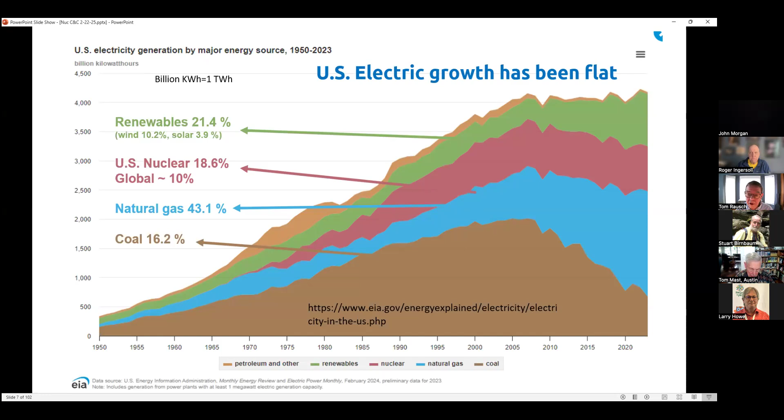I've got four major reasons why nuclear is such a big deal now. They really emphasize the things I see a lot of non-governmental organizations getting wrong, and I hate to say it, but that's really been one of the big reasons holding nuclear back.

So I'll start with: we need more power, we need more reliable power. This goes back a year, and I'm doing that on purpose. Just a little over a year ago, all of a sudden electricity demand is spiking. I think most of you probably know why - the data centers and artificial intelligence seem to cause a big change in everybody's forecast.

Go back again a year ago, and the forecast for 2028 was 38 gigawatts of growth in demand. That is massive, I'll give you perspective on that in a second. Then all of a sudden, December, just a month and a half ago, the forecast was double or triple that. It's crazy.

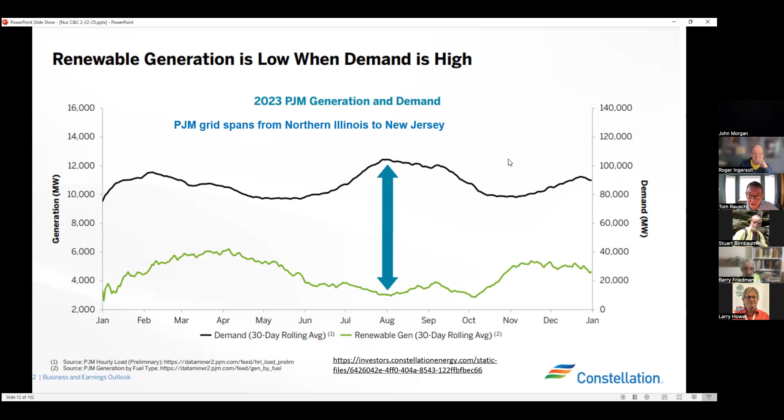Some of the times when demand is the highest here, if you can see my cursor, the renewable output is the lowest, and that's awful. Of course we don't have the solar generation up north like you do down in Texas, but you go through the same type of things on cloudy days and cold days.

A lot of well-intentioned green groups just ignore this concept and think, well, we can store the excess. You'll see in a little bit how hard that is to do.

I like this one. This is what the nuclear industry likes to tout: the capacity factor, or what percentage of the time you're getting your full power. Some of that's not fair because nuclear plants are intentionally run at almost full power for economic reasons, but to compare it to wind, that's a really good number.

That means a third of the time you're getting your wind output, and in solar nationwide it's roughly a quarter of the time. But that's because the major grid-scale solar installations are in the south and west. In Northern Illinois, if we tried to do it on solar, we're talking 10 to 15% capacity factor. Houston, a lot of you from down there, 17%.

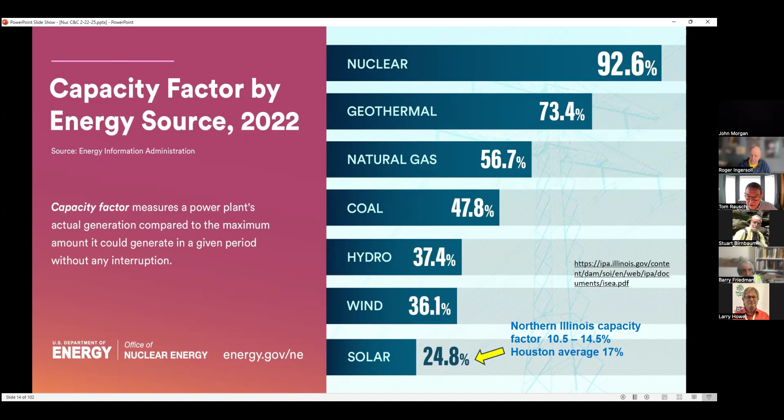I think a lot of people don't realize that to equal full power capability, you need, just to start, 4 times as much solar in a good part of the country and 3 times as much wind on average. Then you need somehow to connect it and have it sitting there and available as stored energy.

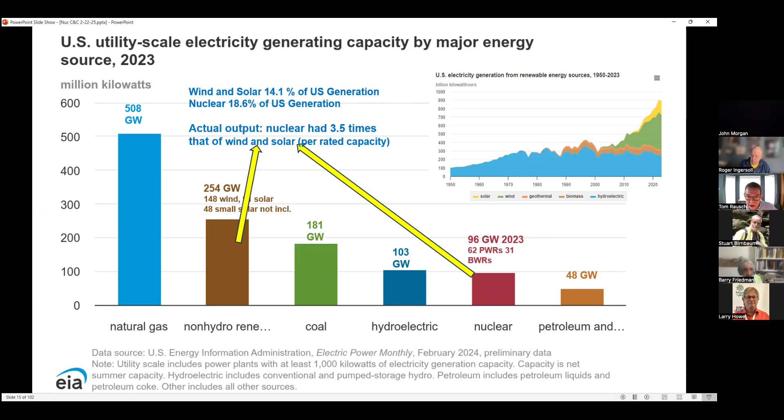When you look at the actual output of all the wind and solar in the country from 2020 to end of 2023 and compare it to nuclear, it was 3.5x. So in terms of per rated capacity, nuclear was 3.5 times more. That's just a reflection of the previous slide.

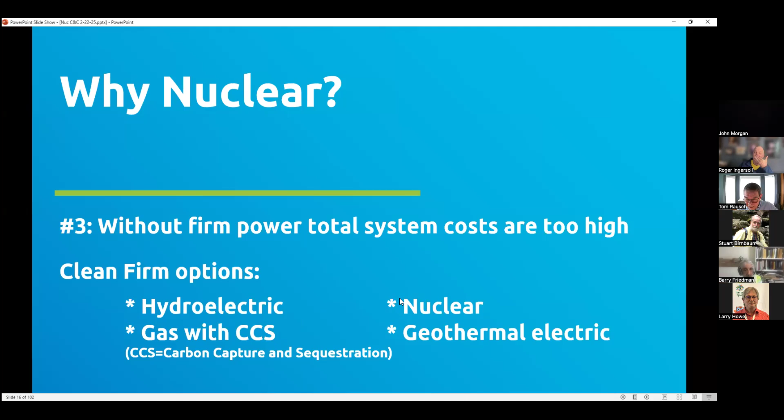Let's get into more specifics on what happens if you try to run a grid without something like nuclear. Without firm power, as defined below, it's just too expensive. Nobody's done it other than in really unusual grids with a lot of hydropower, like in South America. By clean firm power, I mean hydroelectric, nuclear, gas with carbon capture and sequestration, or geothermal electric, not geothermal heating and air conditioning.

This is my favorite resource. CCLers are going to recognize this name, Jesse Jenkins, the Princeton author of the grid study that we've referenced heavily in our lobbying, showing we've got to get transmission going or we're not going to get anywhere. He made a report on the state of California a couple of years ago, and there were 3 big-time...

What's the right word for it—think tanks that got involved in this. I think the other ones were the Clean Air Task Force and Stanford University. It was funded by the Environmental Defense Fund. Their conclusion was: without clean, firm power, if you try to do it with solar and wind, forget about it.

These wholesale prices range from around 9 cents a kilowatt hour to 15 cents a kilowatt hour if you try to go the other route. And somehow you have to build it—that's the problem. You'd have to add 25 to 40 gigawatts of clean firm power, and the prohibitive cost—even though it's only maybe 50 to 60% more expensive—you just can't do it.

You need a massive amount of land use, a massive amount of storage, a massive amount of transmission hookups without more nuclear, geothermal, or gas with sequestration. So this is a great study.

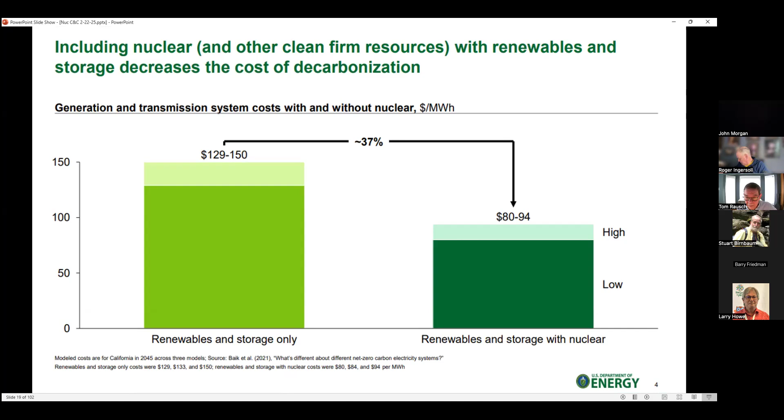And much to my surprise and delight, the state of New York just did a study, released last month, a few weeks ago. Their conclusion for the state of New York was identical to the California conclusion. Unbelievable. They identified a critical need to go to zero emissions in New York, and both New York and California are quite serious about going clean.

You need clean electricity technology that's reliable and meets the demand for power when wind and solar are less available. They call them dispatchable emission-free resources, and they say you need 20 to 40 gigawatts. That's 15 to 35 full-size nuclear units, or more decarbonized firm resources by 2050.

New York has a history of shutting down nuclear plants, just like California did, and they've been successful at it, just like California was. But they still have 4 units left, providing about 20% of the state's generation, whereas California only has 2 left, providing about 10%. So even 2 units, as big as California is, is still providing a huge chunk of California's grid.

All right, well, my last big reason why we need nuclear now: seasonal storage. Everybody thinks we've got batteries that are getting cheaper by the day. We're all set, all we got to do is take excess wind and solar, put it in a battery, and we're good to go. Batteries too expensive? All right, put it in something else, and they're cheap and easy, right? Wrong. They're not cheap, they're not easy.

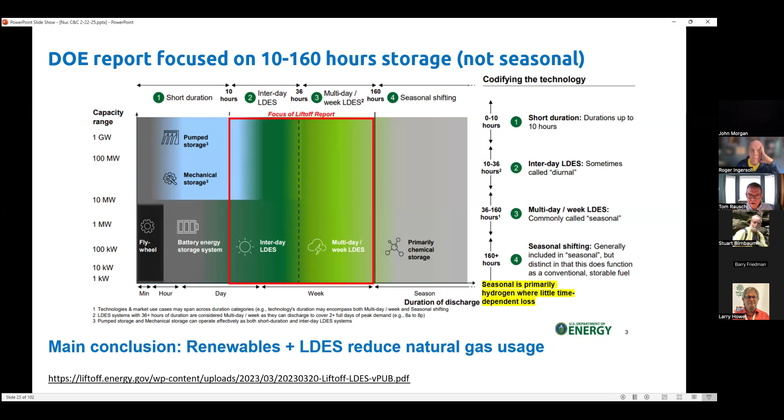So let's get back to nuclear - I'm just repeating the first point. You have to remember that having enough wind and solar to meet demand, you need to be able to last days, sometimes weeks, and maybe even months. So if you want a full clean grid, you need reliable, firm generation of something, and nuclear fits the bill. Now let's get into more fun stuff.

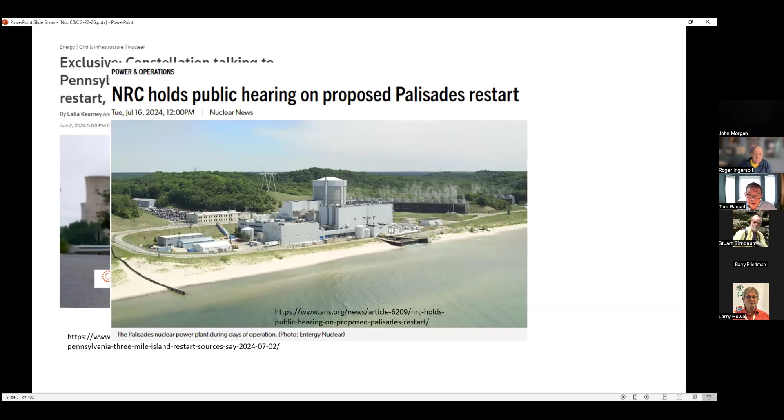Palisades nuclear plant on the shores of Lake Michigan in Michigan - we're going to do the same thing. Duane Arnold in the state of Iowa, the only nuclear reactor in the state of Iowa, a half power size one - we want to do it too.

And Microsoft signs a power purchase agreement with Constellation Energy for the Three Mile Island restart, and they're going to do it. This one I really like because they can do it without any loan guarantees, which are up in the air right now with the new Trump administration. All funding is kind of up in the air - hopefully that'll clear soon. They have a 20-year power purchase agreement.

It's 835 megawatts, almost a gigawatt. They intend to do it by 2028. I met on Zoom in a small meeting - I got to meet the plant manager and the licensing engineer as a member of American Nuclear Society. This was only a month ago, and the word I just got is they're ahead of schedule. They expect to create 3,400 direct and indirect jobs and add about 16 billion to Pennsylvania's GDP.

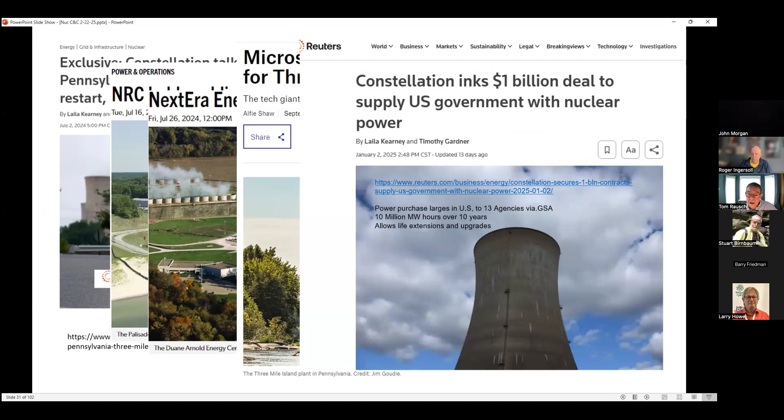And they also signed a deal with the U.S. government back in January, and I think this one is still solid, to supply U.S. government buildings with nuclear power. This is again a power purchase agreement.

And Texas, one of my favorite states, because they can make things happen. They had a blue ribbon committee create a report over a couple of years, and the conclusion of the report was basically that nuclear makes a lot of sense in Texas. This just came out in November.

And again, back to Tennessee Valley Authority - they're actually working with General Electric Hitachi to do small modular reactors in Tennessee. I noted this because this was just this year. And another one, New York, is getting more serious. And who else have we got? And a floating nuclear power plant.

So here we are, I'm up to date, only off by a couple of weeks. I could make more of these. I went 20 years and I couldn't have shown you anything like this.

So that's how much has just changed inside a year. Floating nuclear power plants, you bring them on barges. The shipping, the manufacturing can be done in shipyard scale facilities. Makes a lot of sense. And they're serious. Once you start talking factories, you can build quickly.

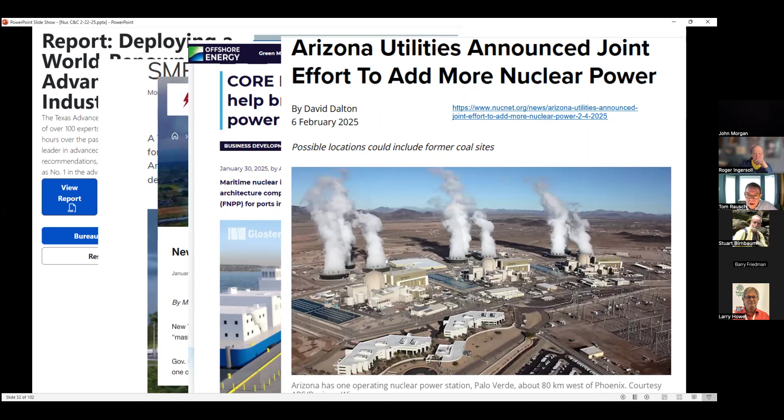Oh, another one, Arizona is looking at a joint effort. And the number of states that are doing something, at least something, it's up around one or two dozen, including Kentucky, Ohio, Utah, Wyoming. It's hard to keep track of them all.

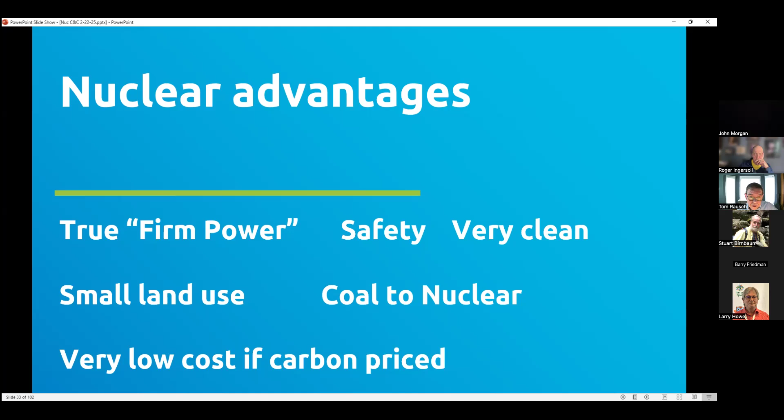So let's go back to a little more direct nuclear things. In about five minutes, we can start letting you see what areas you're interested in, because I've got a lot of slides covering just about everything. I'll hit these one at a time.

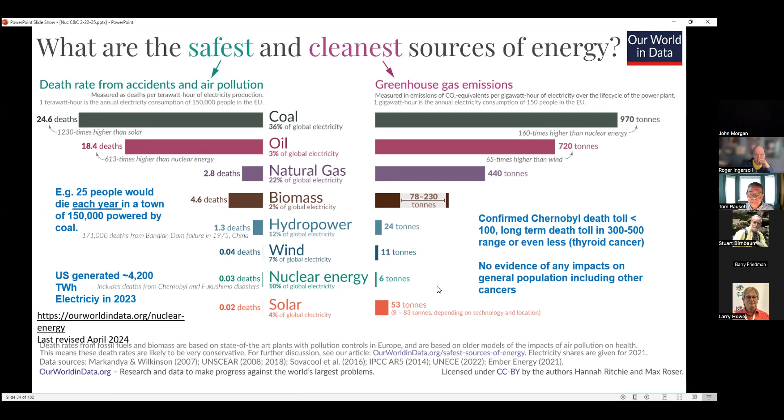My favorite one there -- I don't even know if this slide shows it, I stole it from DOE -- is the grid. You don't need to change it, you don't need to hook it up. The hookup's there, and so is the cooling water.

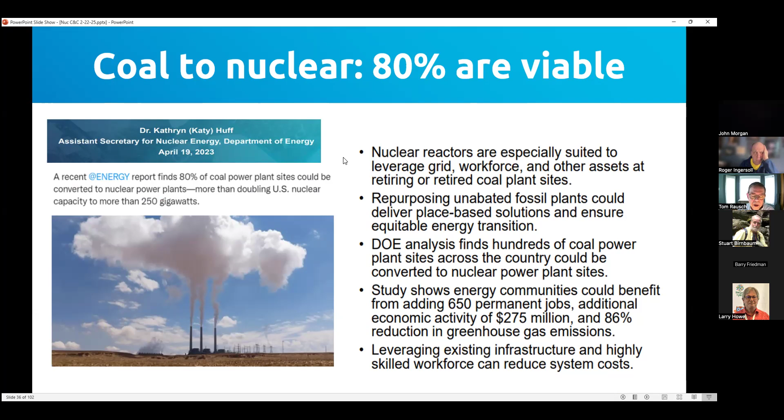You also could do it at existing nuclear plants. You could almost do the whole shot of Biden's goal, which was to double the existing amount -- actually triple the amount we've got now by 2050. You could do it at existing sites, many of which were sized for multiple reactors that never got built.

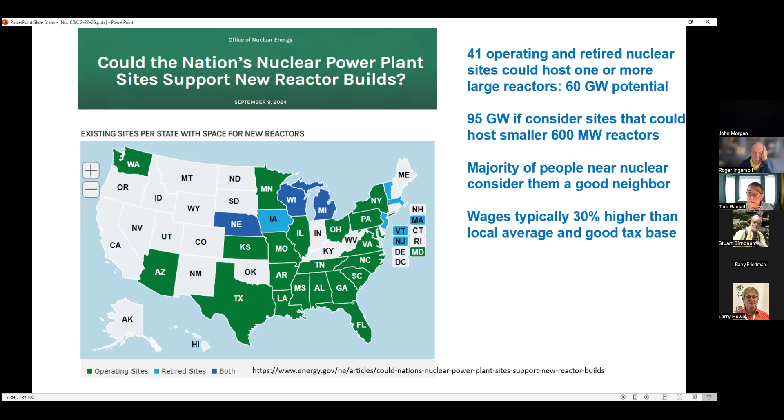A couple more slides, and then I'll open up to questions. Right now, you'll hear about generations of nuclear reactors. Pretty much the whole country is built around generation 2 and generation 3 -- those were reactors designed in the late 60s and 70s. The generation 3 and 3-plus, I would say the new units in Georgia, called Vogtle, units 3 and 4, are considered 3-plus. What's the big difference with the advanced ones? It's generation 3 and 3-plus -- and really, we pretty much have no generation 4s.

Other countries use passive safety, with almost no operator reaction needed and little or no reliance on external power and cooling. Whereas the vast majority of existing reactors require numbers of trains of power sources. I'm calling them trains because they are trains. One train might be 3 sets of pumps, any one of which could work. Another train would be 3 sets of backup pumps using a different method, maybe spraying instead of pumping. And another train doing something else.

So there's a lot of defense in depth in the old reactors, and the newest designs are passive. They use gravity and natural circulation, like a big tank for emergency coolant stored above the reactor, where you just let it drain as needed. What happened in Japan was really a loss of offsite power, a loss of ability to run these cooling pumps, that caused the meltdowns that did happen.

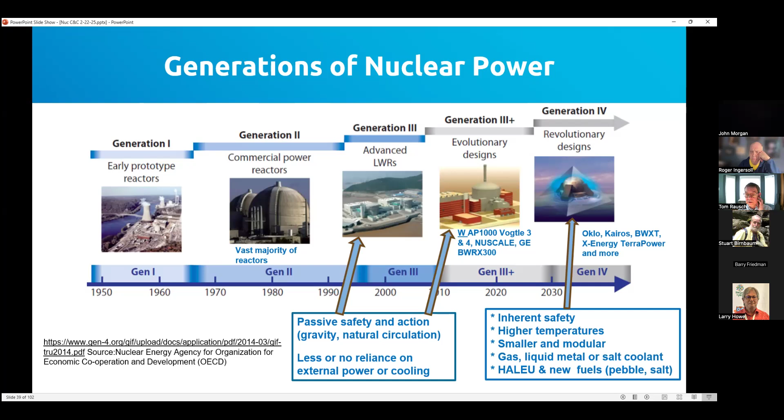My favorite part of this slide is to the right, generation 4 reactors. These are what you hear as small modular reactors. They're inherently safe. They run much higher temperatures, but very low pressures, so you don't have a pipe with a lot of force on it that could possibly break or rupture. They can be built smaller and modular, and they use all kinds of tricky stuff. They run all different sizes, small, medium, and large.

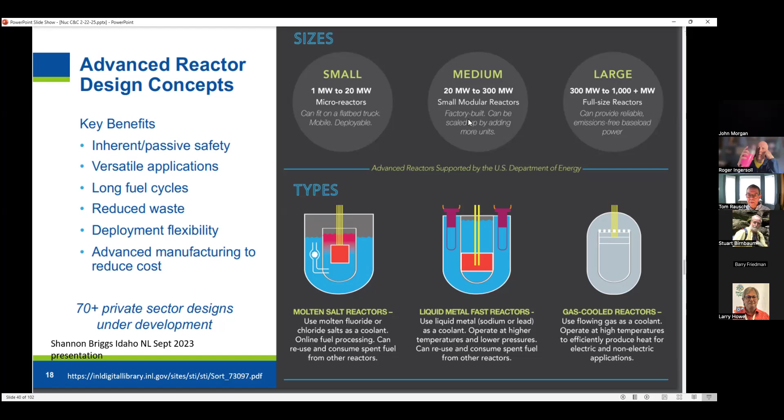Medium is really for small modular reactors. I think we're talking about micro up to about 300 megawatts, so about a quarter of the size of a full power reactor. There's a lot of projects underway, and I want to open up for questions. I'm not going to talk about all these, but all these in red have some sort of funding, and most of that money's out the door.

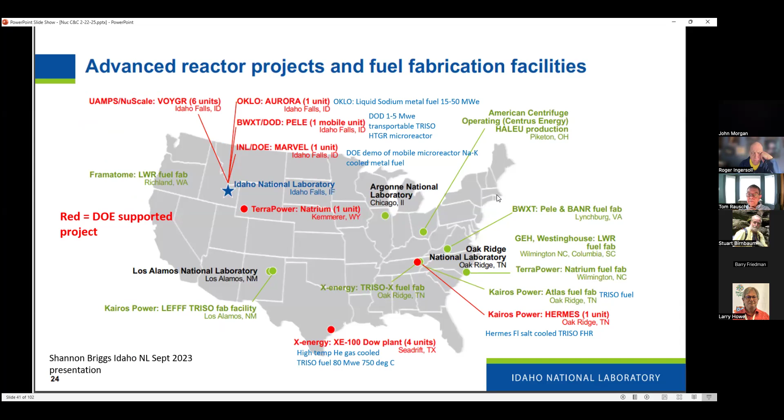And in green are more private ones going on, and around the world there's a lot. TerraPower in Wyoming, you probably heard about this one—this is one that Bill Gates is involved in. They're using liquid sodium as a coolant and really cool salt tanks to store about a third of that power and have it available during the day. So instead of being 350 megawatts, they could be 500 megawatts for part of the day.

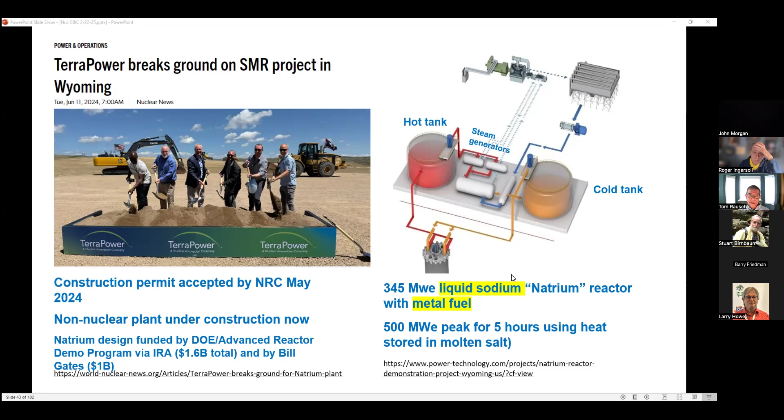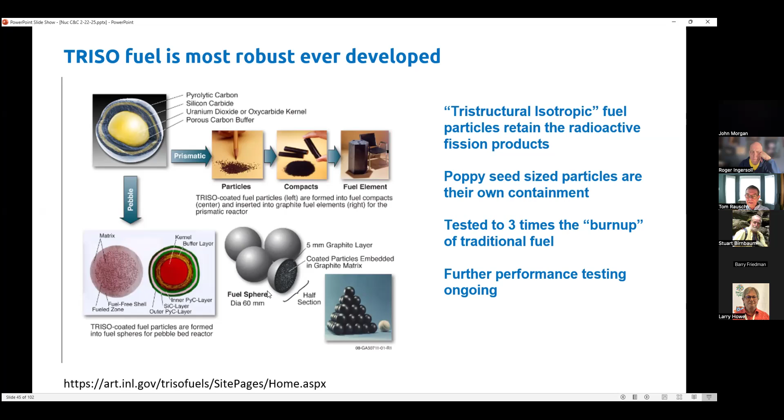Triple layers—if you look on the left of the slide, that's blowing one of these little things up. All the fission products stay inside there, and the various layers are a combination of porous and firm material that allows swelling, fission product gases to be absorbed and not penetrate. Even cooler yet, they put all these inside a ball about the size of a cue ball or tennis ball, or a little smaller. That's the next containment level. And then you run these through the reactor. It's awesome. It's called TRISO fuel.

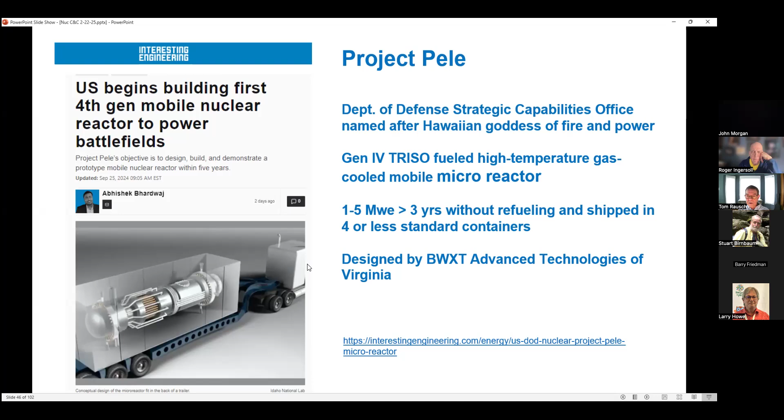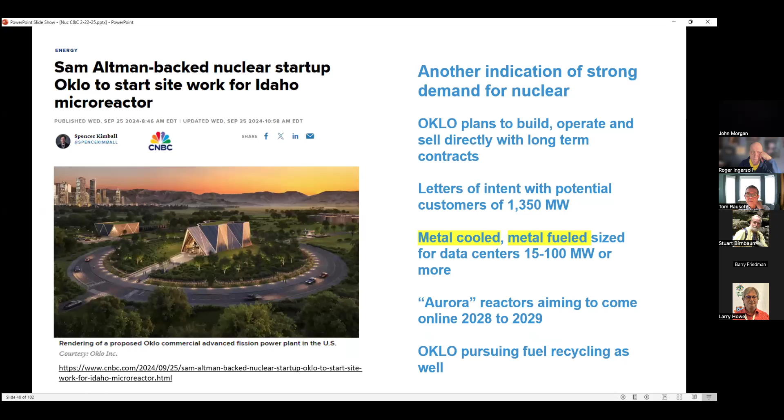I want to open up to questions. The carbon fuel dividend would have made nuclear cheaper than natural gas a long time ago.

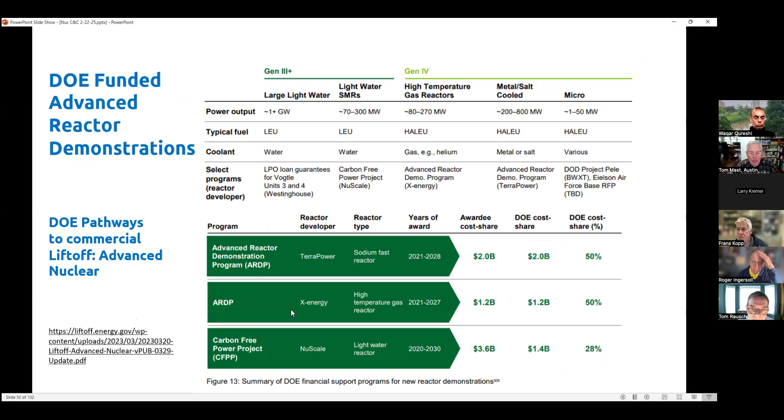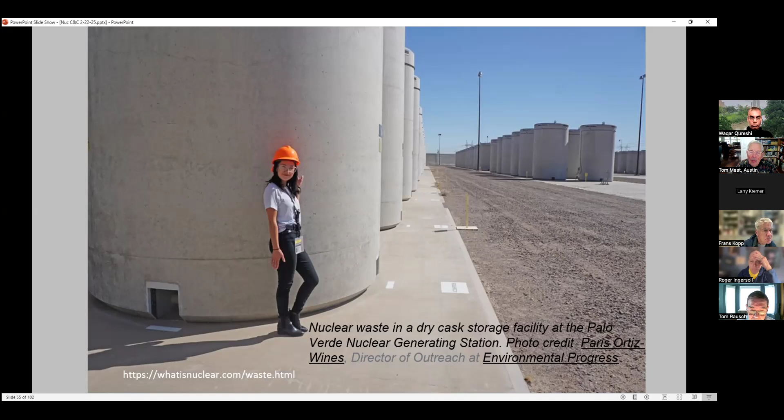This is what it looks like - dry cask storage. You can hug it, you can kiss it. You can hit it with a missile, you can hit it with a truck, and nothing's going to happen. I could show you a great movie of that - they literally took one of these things and hit it with a missile, and the missile destroys parts of the concrete, but the dry cask underneath it, the steel portion, survives.

All the waste would fit on a football field. What's the actual number I had here? What is it - 24 feet tall. And 32 times more waste per day from a coal plant - hazardous slurry - than we did in 45 years of nuclear waste. And it's all paid for: $0.001 per kilowatt hour, 0.1 cents, up to 2013. That's 48 billion, and it's worth a lot more now because of the interest paid on it.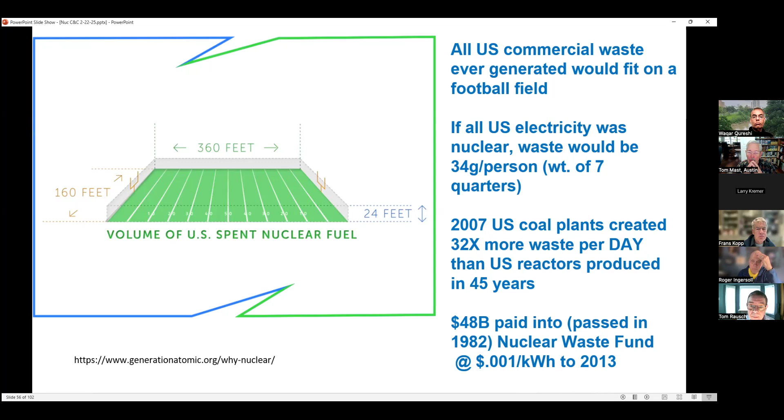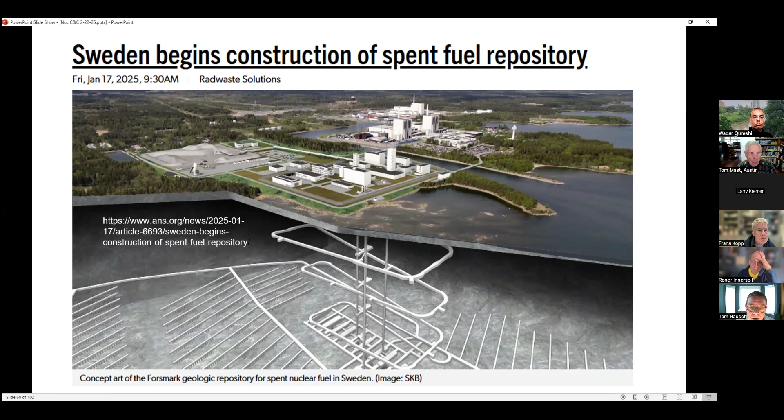So, sorry, let me try to unshare again. Sorry for my digression there. But let's go to the next question.

Tom, thank you very much for a great talk and excellent slides.

I was wondering if you could talk a little more about how nuclear power generation can be integrated with wind and solar - is it actually a good match? Oh yeah, it is right now. So my basic conundrum, as a layperson, is that my understanding of nuclear is high capital costs, so you want to run the plants pretty much full. But wind and solar are variable. If you think about matching with gas on an economic basis, it kind of makes sense because with gas you're just paying for the fuel.

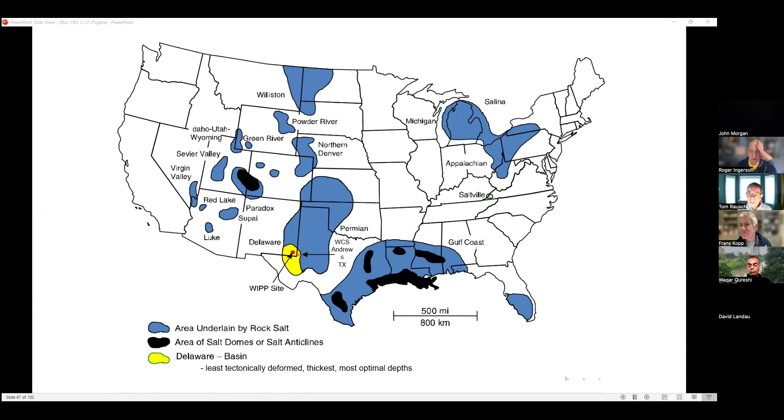Thanks for providing the whole deck. If you could copy the whole deck, he's got another 100 slides there. So are you going to send that to Robert—to Roger? It's in the chat, Larry. It's in the chat. Okay, so if you capture the chat, you can get all 100. I'll save the chat and put it with the video whenever I get that out as a YouTube video in a few days.